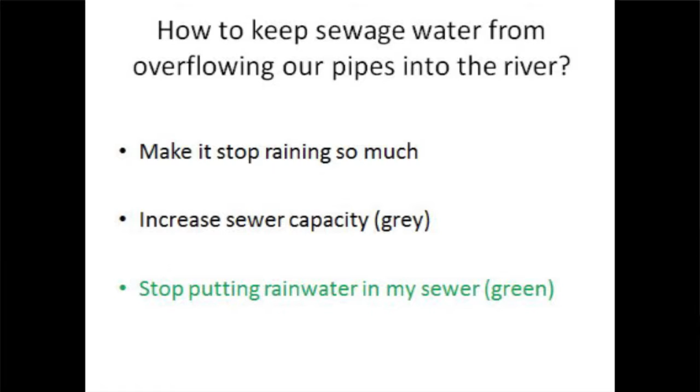We call that the green approach. It's kind of like the same thing as the highways. You have a choice: too much traffic, you can either put more lanes in, or you can convince people not to drive.

Here in Philadelphia, instead of putting in bigger and bigger sewers and tanks and tunnels, we're teaching the rainwater not to go into our drains. As soon as that water goes into our drain, it becomes a waste product.

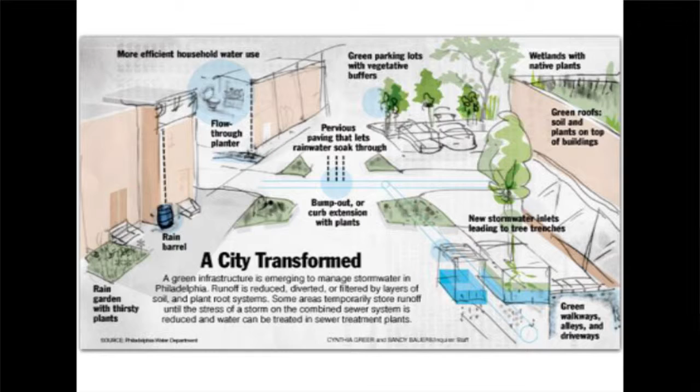We're doing this through a program we call Green City, Clean Waters, and we're basically transforming the entire city of Philadelphia, slowly. Not a revolution, but an evolution over time. We reached a consent order with EPA in September of 2012, where basically we're going to be greening the city over the next 25 years with the effort to keep rainwater out of our sewer. That's it, keep rainwater out of our sewer.

If I was to build a bigger tunnel or tank, it would cost about $10 billion, and I don't have that. So this is not only what we like to do, but it's really the only thing we can do in a city in order to start to deal with this issue of overflows.

So we have this program, Green City, Clean Waters. We call it One Water, One City, many different places. And we're looking everywhere, every square foot of the city of Philadelphia to see where can we do something green, where can we keep water out of the drain pipe. We look at communities, transit, rivers and streams, parks, schools, streets, businesses, parking lots, universities. I don't see homes and residents on there, but it certainly belongs there.

Every square foot. What we promised EPA is that over 25 years, we're going to take 10,000 acres of impervious cover. Imagine 10,000 acres of parking lot, and take that water that's now going into our sewer system, and then going into our overflows, into our rivers and streams, and we're going to manage that water above ground. You can do that with very green methods, or with gray methods, across 10,000 acres.

One of the things we're looking at is the streets. We put together this manual called the Philadelphia Green Streets Design Manual. It's online, it's available, and we're hoping other cities take it, use it, and perfect it more than it is now.

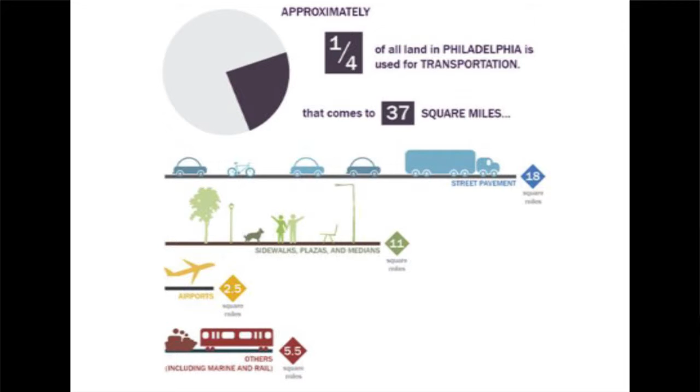The way I've always done it is we give them new concrete sidewalks, new pavement, and we leave, and it costs about $3 million for every mile of this that we do. The cost, instead of putting this back as impervious, to put it back as a green street, is pretty minor in the overall cost of building this sewer in a block like this. So I have a very easy way to take a street like this and make it green.

Minor being what? I call it ancillary cost. We use 5 to 10% of the cost—if you have a $3 million project, it's going to cost an additional $100,000 to $200,000 to put a green solution in rather than replace it in-kind with cement and pavement. It's within the margin of error for a $300 million a year capital budget.

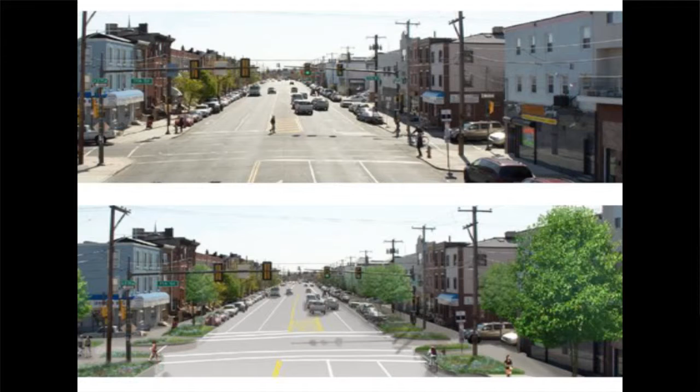The top is looking at one of our larger streets, Washington Avenue, showing in pictorial form what can be done to make that street green. I'm keeping the water out of the sewer, but while doing that, I'm adding bump-outs, adding trees, doing a whole bunch of things that ease traffic, make pedestrian crossings simpler and safer, and provide bike lanes.

This will be done. This is a cartoon, a drawing.

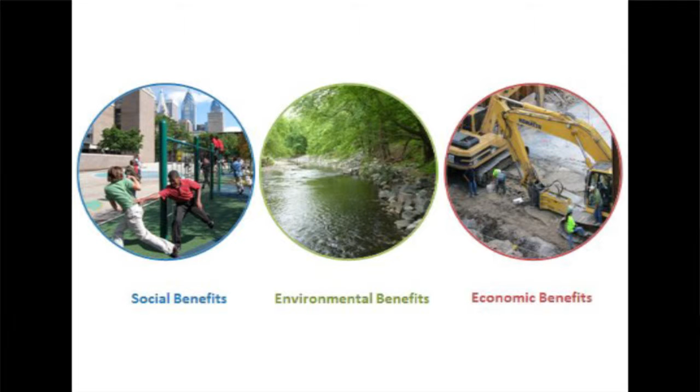We're doing this, and as I think I heard a number of speakers talk about, triple bottom lines: social, environmental, and economic benefits of what the water utility can do in support of a sustainable city.

We've now completed about 800 different green projects in the city of Philadelphia, and about 400 of them deal with street projects. The rest are schools, businesses, residents, and a whole bunch of different things.

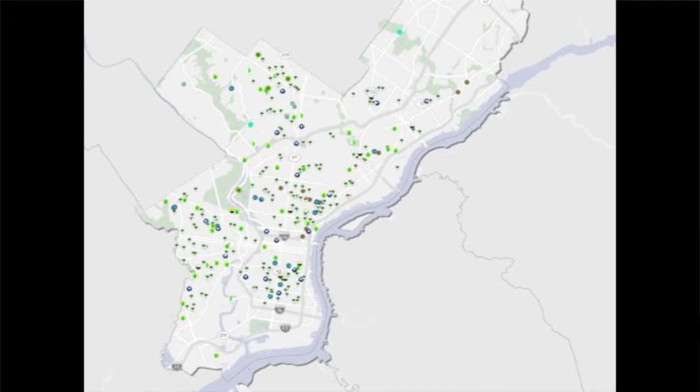We also have stormwater regulations that require every time somebody rebuilds in our city, they need to rebuild and manage the stormwater. Right now our rebuilding rate is about 0.4 to 0.5% of all the impervious cover gets rebuilt each year as old buildings go down and new buildings go up.

We've started a fee system, so we now charge people for sending their stormwater into our street drains. That has created a commodity of rainwater and given us a way to make it valuable, building a business around keeping that water out of our sewers.

Did you change the little street in the first place? You showed us, did you make that green, the little street?

No, we didn't, because we're new in this program and trying to figure out how to connect the dots here. How do I get my green design folks connected with my gray design people? People have been doing this for 50, even 100 years.

How do you get them to work together? How do you get them to work with the streets department, the planning group, the communities, everything you hear about bringing everyone together? It's really very important.

But that street, no. That's the catch, that's the thing we have as we move forward. There's a lot of streets, we do about 8 miles a year for sewers and another 25 miles for water pipes. Making these connections, Mayor Emanuel in Chicago also connected infrastructure for water systems versus gas, electric, and streets, figuring out how to better coordinate. Unfortunately, even though it's 2015, we still have a lot of room to improve that coordination.

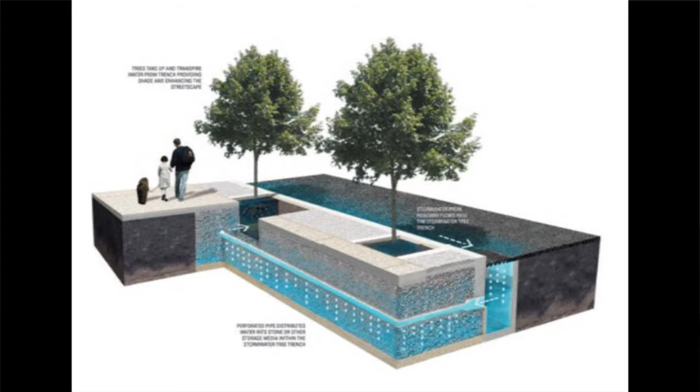This is just a picture that shows the street. If you're walking down it, you don't notice anything other than a beautiful new sidewalk and street, but the reality is you have a rain system capturing the street runoff, bringing it underneath the tree pit, providing a place for infiltration. If the ground isn't good for infiltration, it'll hold the water back for a while and then release it to the sewer, because my purpose is to keep rainwater out of the sewer as long as possible so we don't overflow.

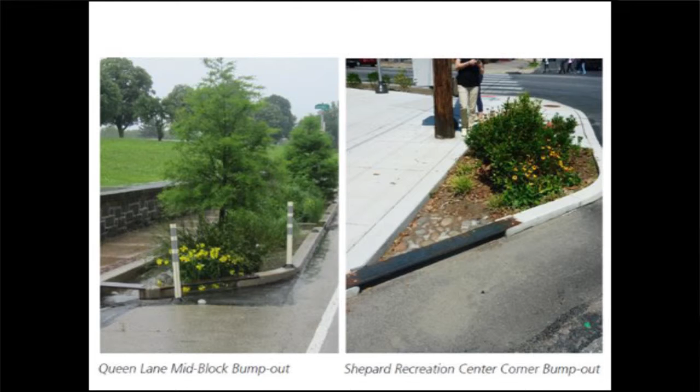Now we have 40 porous pavement streets on the books. We have a number that are being designed and built as we sit here. Again, the idea is just to make it porous.

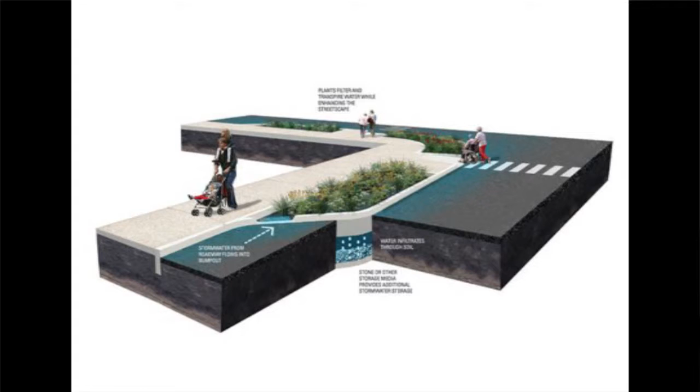This shows a bump out we're designing in connection with ADA ramps. Is ADA ramps just a curse for Philadelphia, or is it national? Yeah, okay, I'm seeing some, yeah.

The water department needs bump outs, and needs to take impervious cover and make it pervious, while the streets department needs to build these ADA ramps. And not only that, but the ADA ramps get little puddles at the bottom, which the public doesn't like. So we're looking at ways to deal with that.

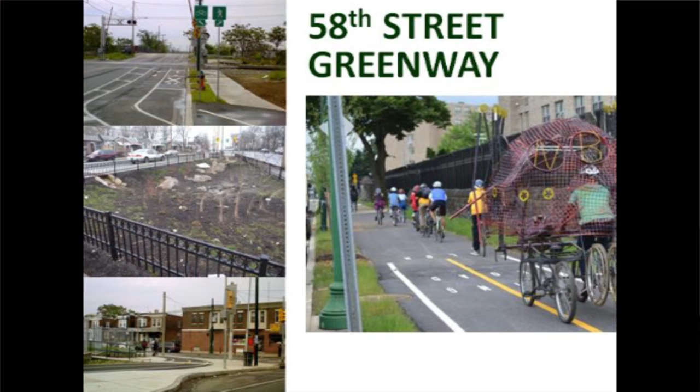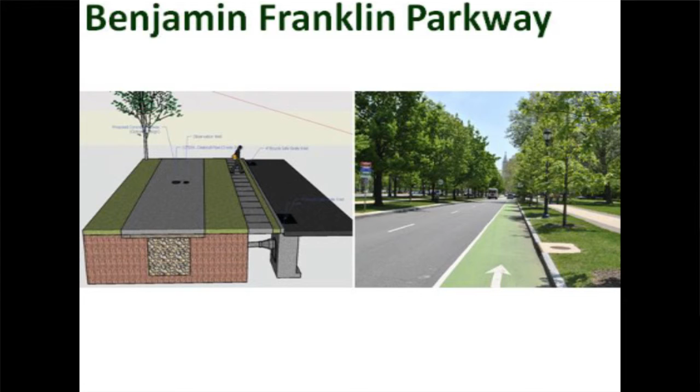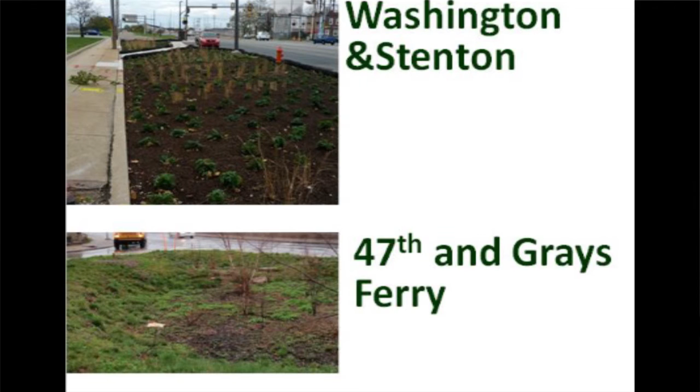Washington and Stenton, a number of different sites. One's a street where we had a lane that needed to be closed, so we bought the lane from the streets department and did stormwater management there. On the bottom is a traffic island, more bump outs, porous pavement, permeable pavers. We have a parking lot with 6 different kinds of permeable pavers that we're testing with the EPA.

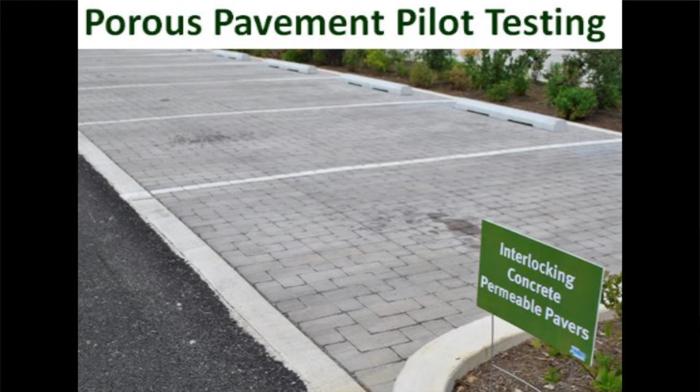We've taken this and put it into a street design, so this is really engineered - these are engineered systems. We've provided color graphics and put it all together into this manual.

And Mayor Nutter is very proud of what's been accomplished here, and there's so much more that needs to be done. Thank you. All right.